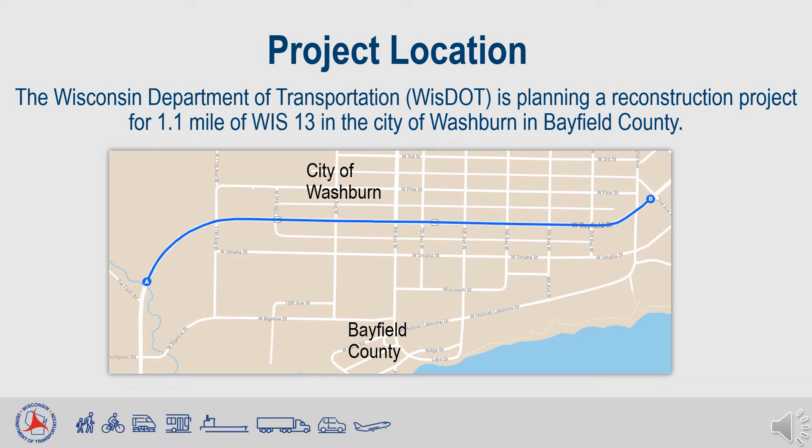This slide shows the limits for pavement improvements under project ID 8160-0005 in the city of Washburn. More specifically, the project will begin on the north end of the Thompson Creek Bridge on the west side of Washburn and extend 1.1 mile to the east side of Washington Avenue.

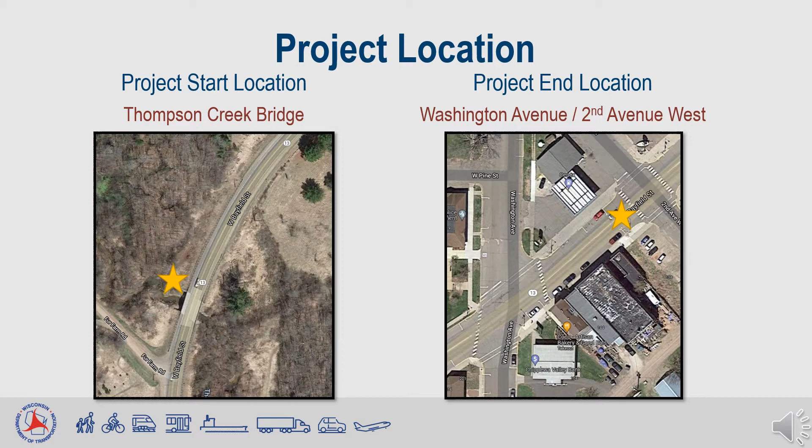Wisconsin 13 is the main route from Ashland to Bayfield through the city of Washburn. This principal arterial has an annual average daily traffic count of 7,200 vehicles. Of those, approximately 11% are trucks. Wisconsin 13 is a designated Wisconsin long truck route.

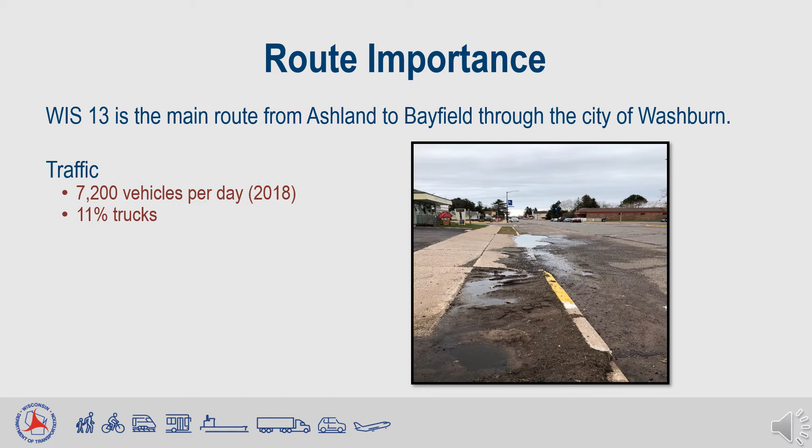The purpose of the proposed project is to address deteriorating pavement and extend the roadway's service life. Cracking has become visible in the existing pavement. The project also has secondary needs such as substandard curb ramps and sidewalks and aging underground utilities, including storm sewer, sanitary sewer, and water main.

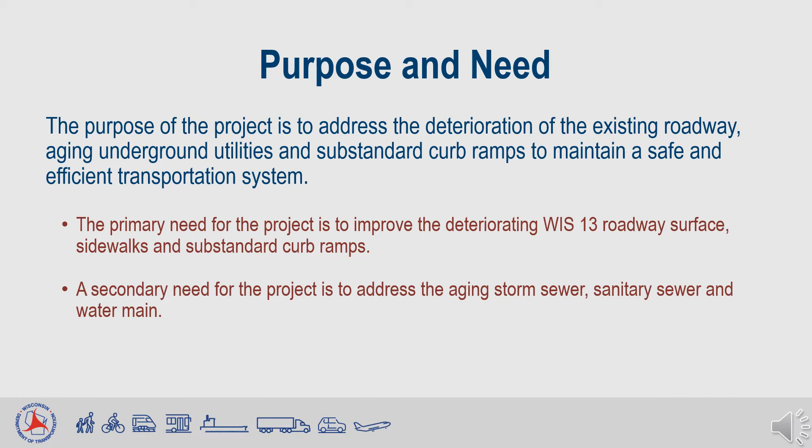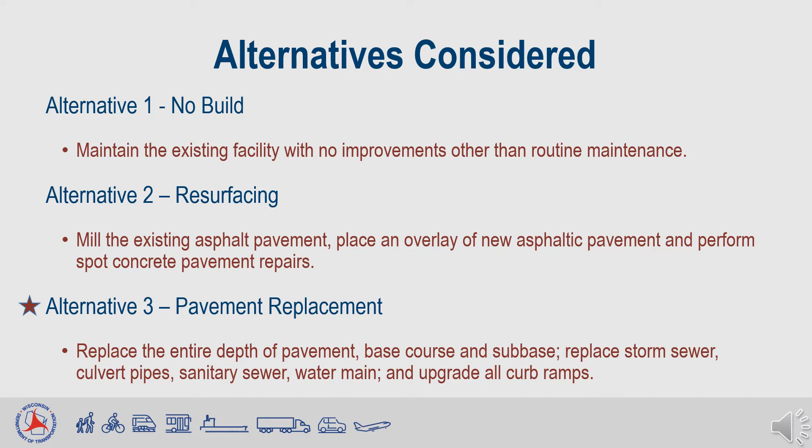Three alternatives were considered. The first would do nothing beyond normal maintenance such as crack filling. The second would mill and overlay Wisconsin 13 and complete spot concrete repairs, addressing the primary project need. The third would address the primary need by replacing the pavement, as well as addressing the secondary needs of replacing sidewalks, curb ramps, and underground utilities.

This slide summarizes the alternatives. Alternative 1 does not address the purpose and need, as the existing pavement would continue to deteriorate even with normal maintenance, and the road would eventually lose its utility as a travel route.

Alternative 2 does address the purpose and need of improving the deteriorated pavement, but it does not address the secondary needs. Alternative 3 does address the purpose and need of improving the deteriorated pavement and secondary needs of replacing the sidewalk, curb ramps, and underground utilities.

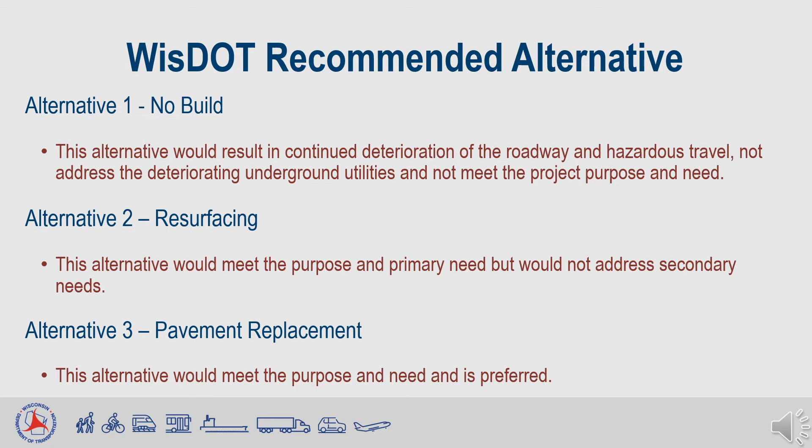Proposed improvements include replacing the existing pavement base and subbase, sidewalk, curb and gutter, curb ramps, street lights, signs, and pavement markings. In addition, 2 culvert pipes crossing Wisconsin 13 on the west end of the project will be replaced, as will underground utilities, including storm sewer, sanitary sewer, and water main. There are locations of poor ditch drainage that will also be addressed.

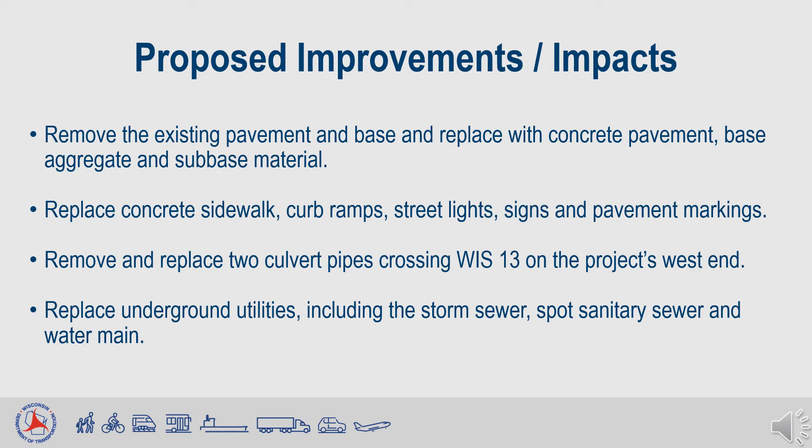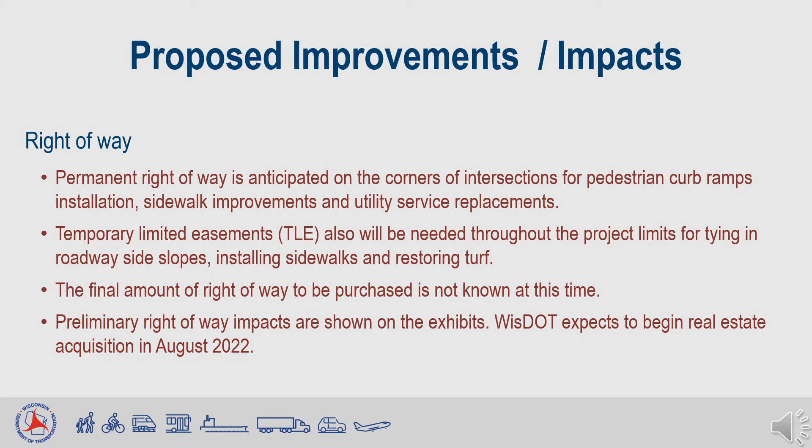Permanent right-of-way is anticipated to be required on the intersection corners to allow for the replacement of curb ramps. Temporary easements are expected to be needed along the entire corridor for the installation of sidewalk. The final amount of right-of-way to be purchased is not known at this time.

During construction, the full closure of Wisconsin 13 is proposed. Small vehicle traffic will be detoured on local streets, most likely Omaha Street. Large truck traffic will be detoured on US 2 from County A to Wisconsin 13. Work will be performed in 2 or 3 city block segments.

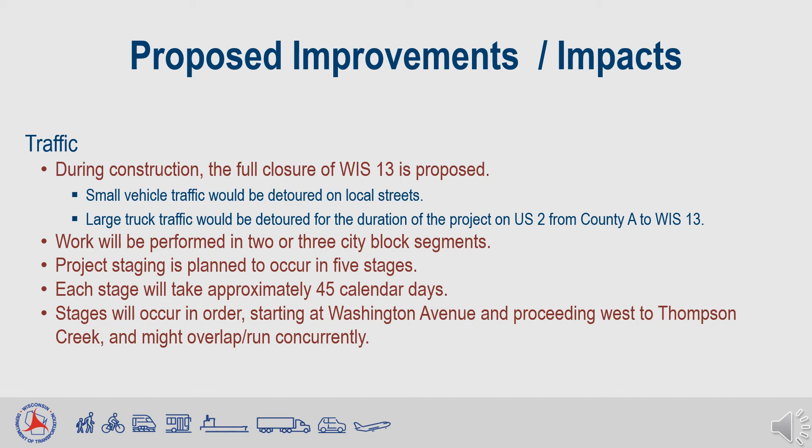Project staging is planned to occur in 5 stages, with each stage taking approximately 45 calendar days. Stages will occur in order, starting at Washington Avenue and proceeding west to Thompson Creek, and might overlap or run concurrently.

WisDOT recognizes businesses located in or adjacent to work zones have special needs. To help them navigate construction, WisDOT created the In This Together program. It includes tips, tools, and resources such as worksheets on project timelines.

Examples of what businesses have done elsewhere, and questions to ask to ensure business owners have a firm understanding of the project schedule and that temporary directional signage is in place and any detours or parking needs can be communicated to customers in a timely manner.

We ask all businesses to check out the In This Together resource guide sooner rather than later and reach out to project staff as questions arise.

We want to hear from you. Comments and questions regarding the proposed project can be submitted by email, phone, or mail using the comment form on the project website.